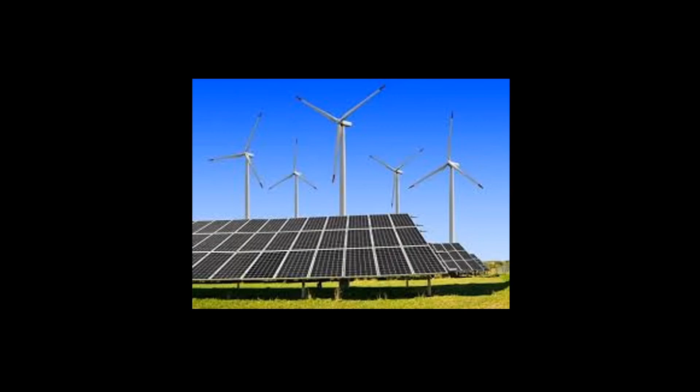So, net zero is going to be having an enormous impact on design and what we in the design industry are doing, because the federal net zero energy building goals were set up by Executive Order 13514, and they were signed into being in October of 2009. It's requiring that all new federal buildings that are entering the planning process in 2020 or thereafter be designed to achieve net zero energy by 2030.

And so you can imagine the ripples from this are going to be huge, similar to when they passed the Energy Independence Act for the electric light bulbs or lamps. What happened with that is they were going to require that initially they went to a higher energy efficiency and then would finally reach a 200% more energy efficient, which essentially made the incandescent lamp obsolete and really forced the LED into a fast track of adoption, of research and development, of really feasible uses for LED. So this whole thing of the net zero energy building code for federal buildings is going to have the same impact.

The concept of a net zero energy building, or an NZEB, one which produces as much energy as it uses over the course of a year, recently has been evolving from what was purely theoretical and then moved into the world of research and development. It's now actually crossed over into reality. Currently, there are only a small number of highly efficient buildings that meet the criteria to be called net zero. As a result of advances in construction technologies, renewable energy systems, and academic research, creating net zero energy buildings is becoming more and more feasible. And it's a good thing because, like I said, having that federal mandate coming on the horizon is really going to help push this. So make no mistake, net zero has become a reality.

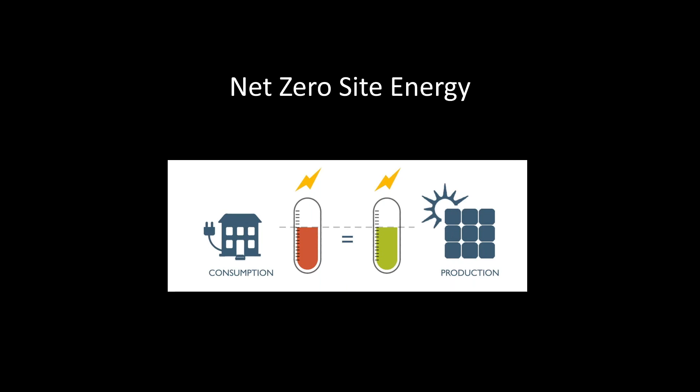So let's take a look at what these 4 different kinds of metrics that could be applied to your project are. Net zero site energy. This refers to the energy consumed and generated at a site, for example, a building, regardless of where or how that energy originated. So in a net zero site energy building, for every unit of energy that the building consumes over the course of a year, it must generate a unit of energy. And this is the most common use of the term net zero. And again, it doesn't really care necessarily where the energy originates from. It could be from a variety of sources.

Now, source energy refers to primary energy needed to extract and deliver energy to a site, including the energy that may be lost or wasted in the process of generation and transmission and distribution. Because when you have something going at an off-site, to get it to the actual building, there's actually a lot of energy that can be wasted in that process, especially if you're dealing with older infrastructure, older wires, and aging systems. There's a lot of waste that can occur in that.

So, for example, you may have a coal burning power plant, and they may generate 1 joule of electricity for every 3 joules of energy coal consumed. So, if natural gas is used at a site, for every 20 joules consumed, 1 joule may be needed to extract and distribute the gas to the site. That factors into your energy use. So the metrics that they're using for net zero source energy buildings account for these factors. So though the exact metrics can vary depending on the site and depending on the utility factors, it is accounting for how much energy is used to get that energy to the building itself, all the way from the coal to the natural gas, okay?

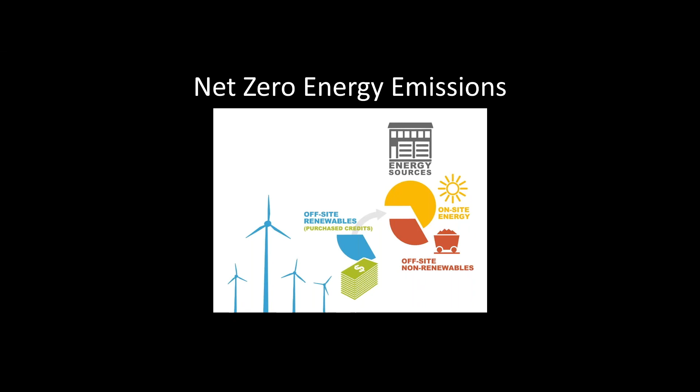Now, net zero energy building principles, whichever metric you're choosing, can be applied to most types of projects, including residential, industrial, commercial buildings, in both new construction and existing buildings. Now, the NREL South Table Mountain campus in Golden, Colorado consists of over a dozen buildings that have achieved not only LEED certification, but most of them have also achieved net zero energy status and are now being used as models for sustainability. Everything down to xeriscape native plant landscaping, so that they can minimize their water usage, is part of this.

So the research support facility building is currently the largest NZEB, net zero energy building, in the United States. So this is for people that say you can't do net zero energy on a large scale. This is a 220,000 square foot project that achieved the net zero site energy goal through a performance-based design build process. So the design and construction teams work very closely together on this.

Numerous energy efficient strategies were implemented, including incorporating advanced heat recovery technologies that were developed and designed by the researchers at the lab, and also installing 1.6 megawatts of photovoltaic power on the campus through a power purchase agreement. Additionally, daylighting, natural ventilation, and a next generation energy efficient data center are among the energy features of this building.

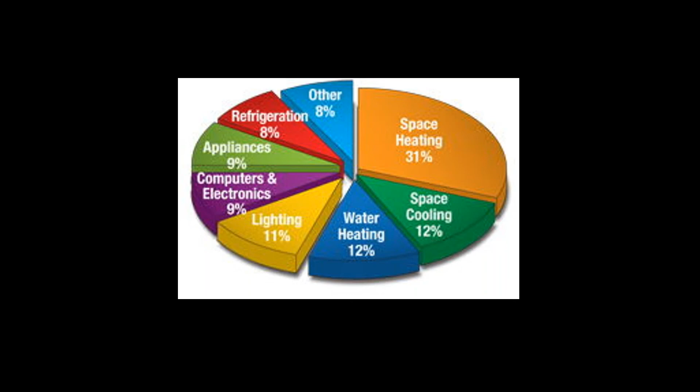Now, on average, the biggest chunk by far goes to heating and cooling at more than 40% of the electricity consumption. Second highest, water heating, 12%. Next, lighting. That's actually gone down as we've seen more and more LED being incorporated in, but still a significant chunk. And then you get into 17% for things like the refrigerator and other appliances that you may have in the house. So simply by specifying products that are more energy efficient, maybe Energy Star rated, you can have a dramatic impact on the total consumption amount for the house. So things like high efficiency appliances.

Energy Star is a rating system, and they provide energy efficiency ratings on a whole massive slew of equipment. For example, refrigerators, freezers, clothes washers and dryers, dishwashers, water heaters, HVAC equipment, televisions. You're all kind of aware of those probably, but you also have to know that they do windows, doors, skylights, roofing products, even light fixtures and lamps, and more and more. Energy Star is actually a U.S. Environmental Protection Agency, EPA, voluntary program.

It was established in 1992 to help promote energy efficient products and buildings in order to reduce energy consumption, to improve energy security, because as a nation, energy use definitely impacts the security of the country. If you are in a fragile state, where you have very high energy demands and you can't guarantee the energy supply, that threatens your energy security. Also, reducing pollution through voluntary labeling or other forms of communication about the products and buildings that meet the highest energy efficiency standards. So they have certifications for homes, for buildings, and more than 50 different types of products that are energy efficient and offer the features and performance that today's clients expect.

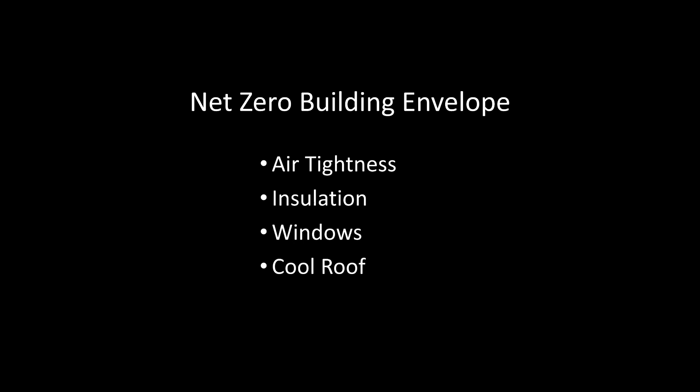That's right. We can build these homes with 70%, 75% or more less energy consumption. Can you imagine as a nation if all of the homes were 75% less energy consumptive? We are talking game changing.

This is game changing. So the first thing I want to talk about is air tightness, specifically using fully adhered membranes. With a fully adhered membrane, you can actually achieve air tightness with a minimum of 1.5 air changes per hour at 50 pascals unit of pressure. There are several ways to achieve this, but one of the best is to literally wrap the entire structure with a fully adhered membrane.

Now, this membrane is the water control layer, the air control layer, and the vapor control layer. It needs to be installed so it is continuous, including sealing it to the bottom of the house.

The OSB or plywood sheathing is going to serve as a vapor throttle, because when you talk about doing this kind of membrane, the first thought most people have, especially if you live in a hot and humid climate, is moisture. Oh no, it's going to trap moisture. Oh no, we're going to get mold. Oh no, there's going to be lawsuits. This is a technology that has evolved greatly beyond what you might have initially thought.

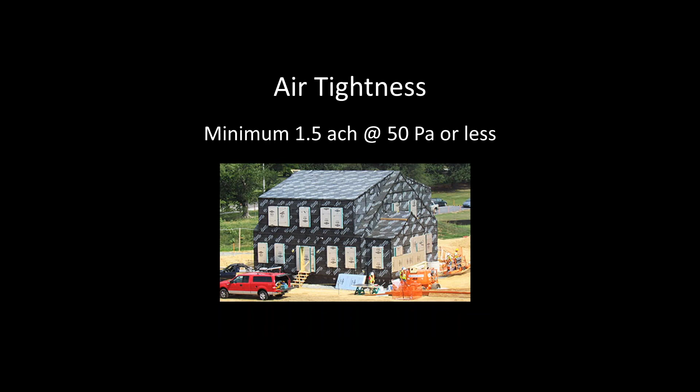So this is our kind of Darth Vader house right now, it's all wrapped in black. The lookout framing can then be added over the top of the membrane, so I have a continuously sealed membrane. You can see in this image here, they're starting to add the little overhangs, and these are a type of almost a snap-away overhang.

If you are building in an area where you have extreme weather, extreme high wind loads, maybe like hurricanes, one of the things that rips a roof off in a hurricane is because the air gets under the overhang and it snaps the roof off the structure. In this situation, my core building is that little building that looks like something a 4-year-old drew in crayons. The wind could get under these overhangs, break them away, but the building should maintain its integrity. So not only do I get a good thermal membrane, but it also gives me a little bit more structural flexibility in high wind loads.

So that lookout framing can be added over the top of the membrane. The next thing is the insulation, so that's all the little white panels you're seeing. That is rigid insulation board, and it is cut to fit inside the open frame cavities of the lookout framing. Then the entire building is covered in a continuous layer of insulation.

This is completely contrary, kind of the reverse of the way we always built walls, where we put the insulation on the inside. The problem with that, and you all know this if you've ever had to do energy calculations, is every stud is a thermal gap. That greatly diminishes your energy efficiency because you have all of those thermal gaps every time you have structural members. By putting continuous insulation on the exterior of the building, you completely eliminate that.

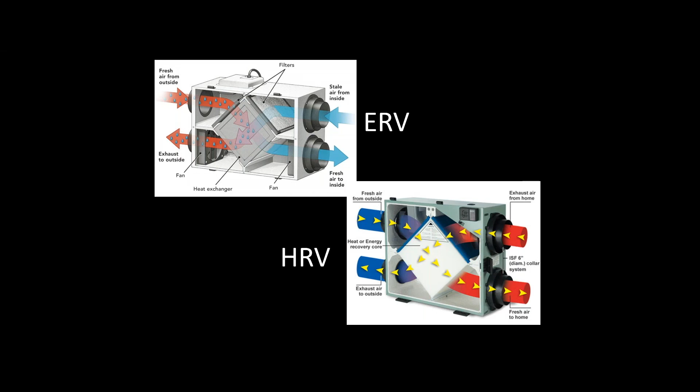Now, one of the biggest challenges when you're trying to build your thermal envelope is also the insulation. And the question is: how much do I use? Where should it go? What kind of insulation should I use? Myriad questions, as you can imagine.

The standard residential construction in most of the country is 2x4 wood framing with fiberglass insulation batts, which achieves a whopping R10 for your walls. If insulation is installed at all on the foundation walls, it's rarely more than an inch thick, and insulation is almost never put under the slabs.

Some states, for example Vermont, started to require developers to improve energy performance, and that led to a widespread switch to 2x6 framing in home building. We're seeing that continuing - a lot of production builders are incorporating the 2x6 framing.

But 2x6 wall construction is still fairly inadequate. A well-built 2x6 frame wall insulated with dense packed cellulose or fiberglass batt is still only going to achieve about an R17 or R18, accounting for that thermal bridging through the conductive wood studs. It's hard to get a higher R value because you have so many thermal breaks.

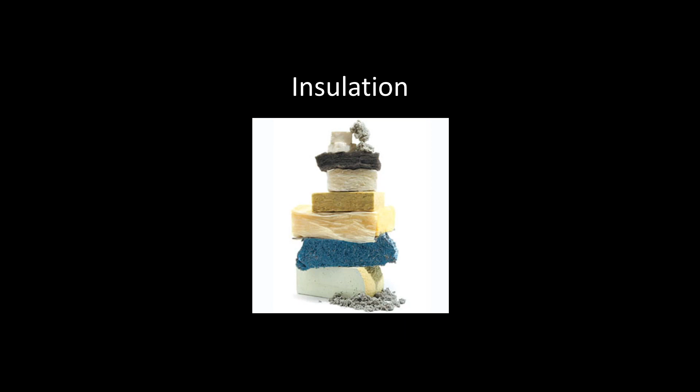So what is a reasonable target that we should now be aiming for when it comes to insulating? I hope you're sitting down. This is your rule of thumb. We used to think that 2x6 walls insulated with fiberglass or cellulose were perfectly adequate, even defining that house as energy efficient compared to standard construction with a poorly insulated 2x4 wall. But that was also when oil was 12 bucks a barrel that we called that an energy efficient wall.

It takes a lot more insulation, and in different places, to achieve the level of resilience needed to ensure that the house is going to maintain livable conditions without supplemental heat or electricity, or with very little supplemental heat or electricity. So the new standard rule of thumb for insulation is 10, 20, 40, 60 - remember that. You're going to have R10 under the concrete slab, R20 in the foundation walls.

I have a friend of mine who's an HVAC engineer in Florida. This is when he started to get shaky - when I said R40 for above grade house walls. And I completely lost him when I said R60 for the ceiling or the roof. He said, 'Can't be done, can't be done.' I will prove to you it can be done, and there are numerous buildings now that are doing it.

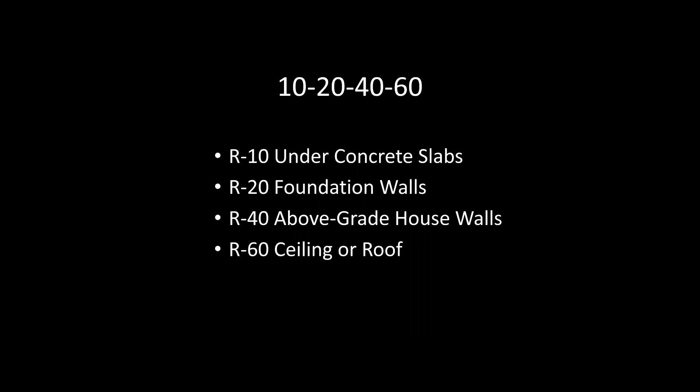So new rigid insulation materials applied to the exterior - first off, they eliminate all that thermal bridging, all of those voids from the structural framing. That's a big benefit. There are a variety of products, everything from foil-faced polyiso to XPS to EPS to rock wool. It's a matter of specifying what you think is best for your project.

Some true sustainable purists do not like to use any of the rigid foam, because rigid foam is a derivation from the petroleum industry. If you're trying to go completely petrochemical free and oil free, that's a byproduct of oil production. But they don't conduct any moisture, which could be a nice benefit depending on what you're trying to achieve. For those who are completely opposed to using any of these petroleum products, the rock wool rigid boards would be pretty much your only choice.

Amongst those, Roxul was kind of the one that has these full rigid boards. It used to be rock wool was just that loose felty type thing - now these are actually pressed rigid boards. Looking at some of the values: polyisocyanurate, 4 inches thick, gives you R24; extruded polystyrene, the XPS, at 5 inches thick, R25; expanded polystyrene, the EPS, at 6 inches thick, R23; and rock wool at 6 inches thick is R24. So these are all fairly comparable, and considerably better than just doing batts in a 2x6.

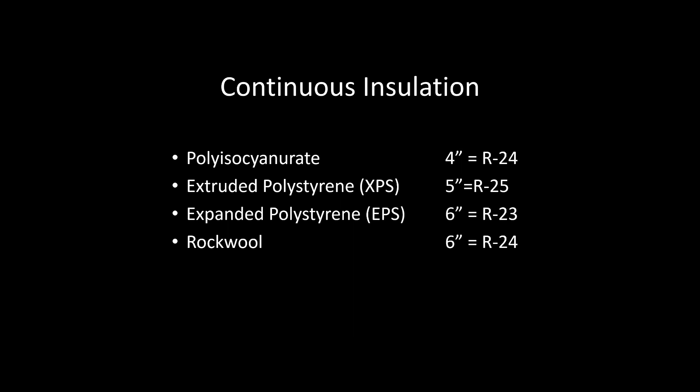Now this type of wall construction we've been talking about, where you've got that reverse exterior insulation, is what's becoming known as the perfect wall. The Building Science Corporation, Joe Lstiburek's group, has come up with these basics, but the concept of putting an enclosure together like this was actually figured out a long time ago, mostly by people living in extremely cold climates like Canada and Norway.

So the perfect wall is what's diagrammed here. You have 2x6 pine studs, 24 inches on center. You have half-inch OSB sheathing, then a continuous adhered membrane - in this case we're using Carlisle's 40 mil peel and stick, which is your air, water, and vapor barrier. Then we do two layers of 1.5-inch foil-faced polyiso rigid insulation boards, a 1x4 pressure-treated lath rain screen, and then the siding.

In this case, this image is showing corrugated metal siding, but it could be any of the cementitious products - there are a lot of different choices for siding. So an advantage of having continuous insulation on the exterior is, primarily, you have continuous insulation.

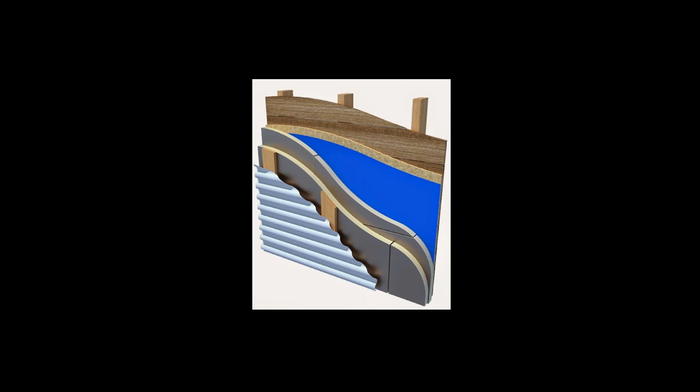No breaks for the studs. This method of wall construction allows you to think about the interior finish out very differently, because you don't have to insulate the stud cavities. Heck, you don't even have to cover the studs. So the continuous insulation is actually applied over the sealed membrane, including the roof.

Remember, we had that black box house, and then we put the lookout framing for all the overhangs. And then we started putting the rigid insulation board continuously around it. You're going to tape all the seams so that you have a tight seal, and that's including the roof. So all the sides of this will be wrapped.

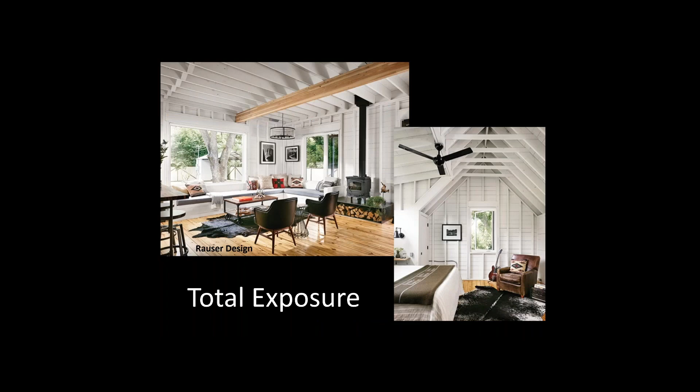Now, remember I said this allows you to get a lot more freedom in how you address the interior finish out as well. For example, take a look at this house. The only reason you put sheetrock up is to cover all the insulation in the cavities half the time.

So in this particular design, this was designed by Rauser Design. It was built by Risinger Homes in East Austin, Texas. And so when I say we have actual case studies of these things in extreme climates, and if y'all don't think there's an extreme climate in Austin, Texas, I challenge you to come here when it's 105 degrees and we have 85% humidity, and that does happen.

And so this kind of thing, you can actually leave all of that open. This is a very different aesthetic look than you could achieve with traditional house construction, and you have a much better thermal envelope for this entire structure. Their electric bill is almost free for this one. They can go pretty much off grid, even though they're in the municipal center.

Now, the other thing are structural insulated panels. Structural insulated panels, most of you have probably heard of them, they're called SIPs boards. This is actually a composite building material. It consists of an insulating layer of rigid core sandwiched between two layers of structural board. So they're most commonly made of OSB panels sandwiched around a foam core.

Now, foam, there's two different kinds. You've got the expanded polystyrene, EPS. You also have the extruded polystyrene, XPS, or rigid polyurethane foams.

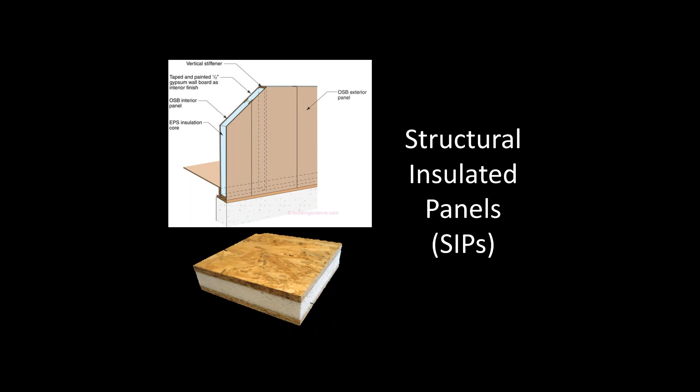The other kind of wall structure you may want to consider for your envelope: most brands of insulated concrete forms, or ICFs, consist of two parallel panels of foam held apart by rigid plastic spacers. The builders stack the ICFs. If you've ever been involved with one of these types of projects, or been on a job site where they're using ICF, it's kind of like a gigantic Lego assembly.

So they stack the ICFs like Lego blocks, brace those forms, and run rebar through the interiors, and then they fill the forms with concrete straight out of a pumper truck. Now, the ICFs are left in place as a permanent part of the building.

So don't think of this as a form where you pour the concrete and remove it. These stay as a permanent part of the building, and they are becoming more and more common, particularly in Florida.

Among the advantages over conventional wood framing or even metal framing: very, very low air infiltration, extremely high thermal mass, incredibly strong and fire resistant, very good sound deadening qualities, and much higher insulating values than especially a standard masonry like CMU construction. They can be used to form the basement walls alone or for the entire wall system, including all of the above grade walls.

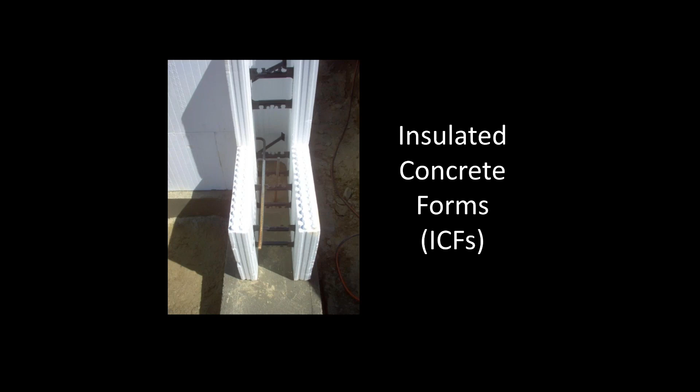So for composite building materials, let's take a look at some of their comparisons. These are minimal R values - I've seen them with much, much higher ones, but I'm trying to go on the conservative end in this presentation. So you all know concrete has virtually no insulating value.

It's got an R value of about 0.08 per inch of concrete. As a result, the R value with the ICF actually depends on the thickness of the foam, so they can range from an R12 and up. Instead, they rely on the thermal mass to add to the energy saving.

That's where concrete is good, with thermal massing, and that can vary upon the location depending on the weather. For example, Minneapolis and Chicago achieve much less of a thermal mass benefit than Phoenix or Bakersfield, California. So the performance R value can vary dramatically depending on the region.

No surprise there, right? So in some instances, builders have added additional continuous rigid insulation to the exterior of an ICF building to boost the R value even further. Both of these materials do eliminate thermal bridges, as they are a continuous insulated material.

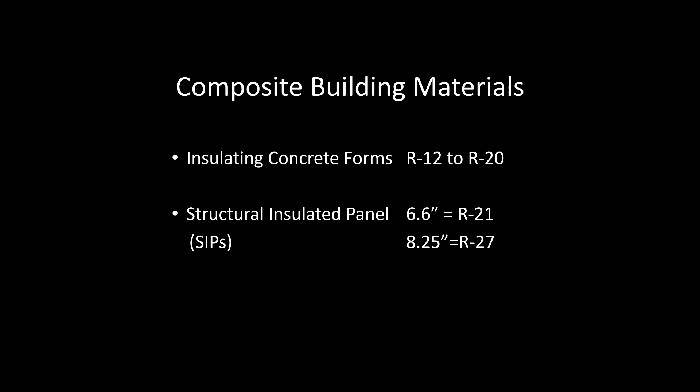But you better make sure you've got all your conduits for your electrical before that concrete truck pulls up. You want to make sure you have all your plumbing and electrical - your conduits, everything - in those forms before you start pouring, because it is very difficult to change window penetrations or anything in those cavities.

Almost impossible. Now, windows are one of the thermal issues. Everybody loves a window, not necessarily the heat gain from it. Typically with windows, R5 is the minimum to look for, but some companies are really starting to go beyond that. They're really re-looking at the window. High efficiency windows include well-built, air-sealed windows with good thermal performance.

Not great, but good. Typically what you're looking at is a double glazed or triple glazed window with insulating gas between the panes, usually argon or krypton, and a low E, or low emissivity, coating. That's what gets considered a high efficiency window. And high efficiency - if you've got an old house with double hung windows with counterweights, an air leak, and a single pane of glass, this is a light year ahead of that.

Now, that low emissivity coating, the low E coating, is what's preventing the radiant heat from crossing the window plane. For example, it keeps the heat inside in the winter, but outside in the summer. Now, the framing material is as important, if not more important, than the glass.

Framing materials like fiberglass and wood have very low rates of thermal energy transmission when you compare them to aluminum or PVC vinyl. Those consistently have some of the highest negative environmental and health impacts according to the life cycle assessment techniques from the United States Green Building Council.

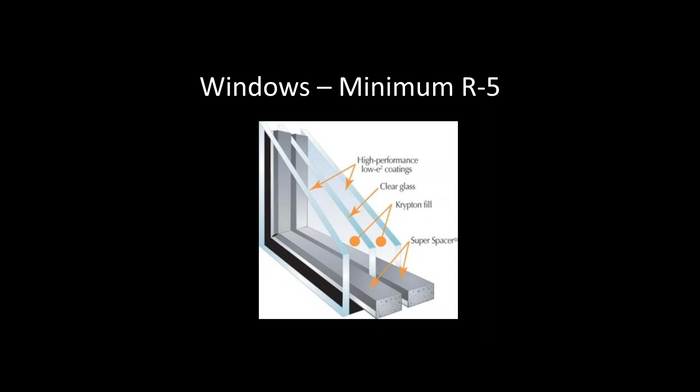So what does it all mean? Well, when you're dealing with windows and glazing, there's a whole alphabet soup out there. A lot of things are thrown around as terms, and some of them are kind of doublespeak. So you've got low E, U factor, the solar heat gain coefficient, SHGC, and the visible light transmittance, the VLT.

So low E windows have a microscopically thin coating to lower the U factor, or in other words, its ability to transfer heat. A low E coating can reduce the energy flow 30 to 50%. Just this coating, 30% to 50% reduced energy flowing through that window, usually in the form of heat.

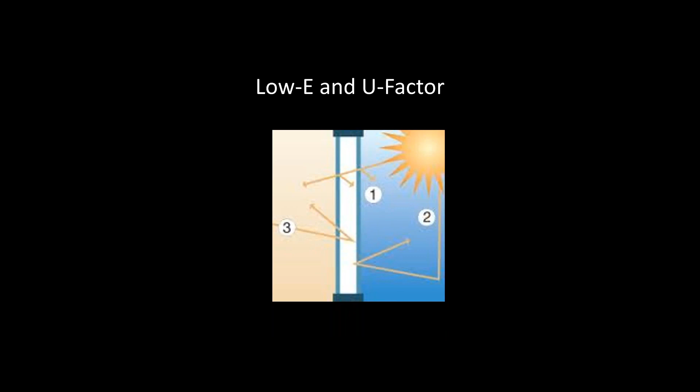So what is the difference between U factor and R value? And this is always the problem. Everything else that has anything to do with insulation uses an R value rating, except windows. They use a U factor rating. So the U factor is used to express the insulation value of a window. R value is for everything else. So how do I do an apples to apples if I'm trying to do my overall energy consumption and my overall energy rating for the entire structure?

Very simple. Math, my favorite thing, right? So to compare R value and U factor, all you have to do is divide 1 by the U factor number. So for example, you have a 0.25 U factor. 0.25 goes into 1 how many times? This is even math that I can handle. Goes in 4 times. Therefore, it has an R4 rating. If you've got a 0.20 U factor rating, 0.2 goes into 1 5 times. You got an R5 rating.

So in other words, it's kind of opposite. You have to stretch your brain a little bit. The higher the U value, the lower the R value. So these are in opposition to each other. So just remember, opposite, high U factor, ugly. U for ugly, the higher it goes, not good.

Now, in the past, the recommendation was that in northern climates, windows with a higher U factor, which meant a lower R value, a lower insulation level, but with a higher solar heat gain coefficient, were better because they allowed for using thermal mass to store heat for the structure. Now, in southern climates, a product with a lower U factor, which had a higher R value or higher insulating value, and a lower solar heat gain coefficient was more desirable because it would decrease the thermal heat.

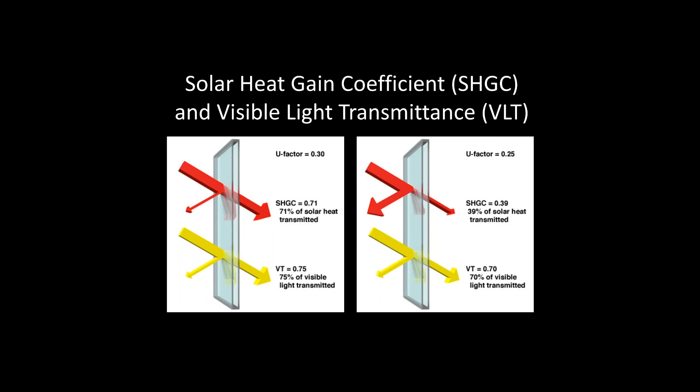So one note on the difference between net zero energy goals and resilient energy goals: sometimes their objectives may not perfectly line up. So, for example, with net zero energy, you want to have an extremely efficient envelope, and you can keep the climate controlled with very little energy because of that.

But you know this, even with a high energy window, every time you punch a hole in a wall, you're reducing the efficiency of your envelope. So, net zero doesn't want you to have windows, but resilient design says you may still run out of energy production, so you need to have a building with operable windows to take advantage of passive cooling.

So this is where there needs to be a little bit of latitude in your overall scope of what you're trying to achieve. And so where are the priorities placed? If you want to have windows for aesthetics, look at where you're placing those windows so that you can minimize the impact as much as possible.

Now, the other part of your envelope is the roof. And when it comes to the roof, getting an R60 will give you unbelievable returns. And believe me, this is where I lost my friend who's the mechanical engineer who designs cooling systems in Southeast Florida. He's like, R60, not going to happen. And when I showed him this, he actually had to eat his words and go, okay, it is happening. You can make it work.

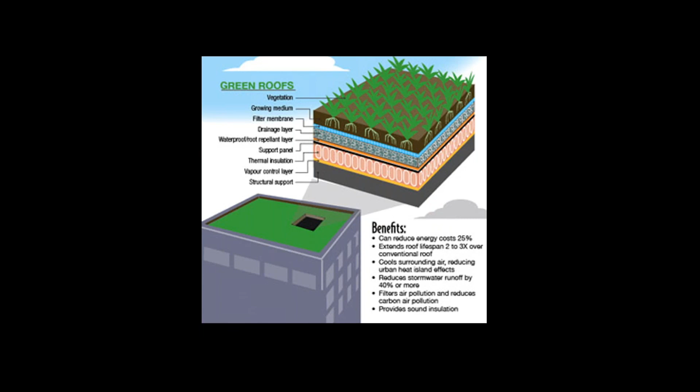And they stand up very well to extreme weather like high hail or other kinds of impact. You may have to replant your roof. Your tomatoes and corn and beans may get smashed, but the roof itself will do a much better job of standing up to these weather extremes.

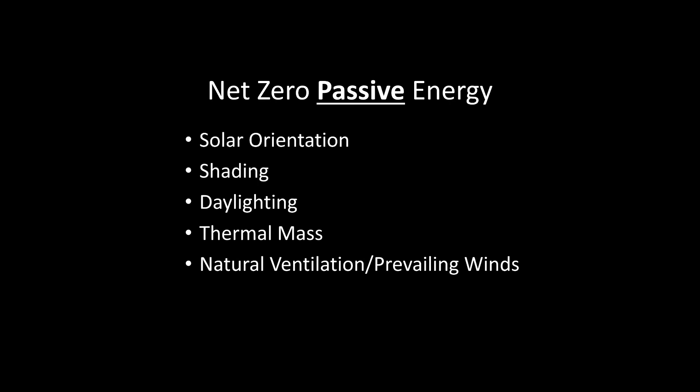So the other type of thing is when we're looking at net zero, you have passive energy and active energy. And so net zero passive energy, some examples of passive energy are solar orientation, shading, daylighting, thermal mass, and natural ventilation and prevailing winds.

Solar orientation, most of us are familiar with this one. It's how the house is oriented to the sun, and it can have a dramatic impact on heating and cooling costs. The goal is to maximize natural daylight year-round and gain heat only when desired.

So to do this, the home should be longer from east to west than it is from north to south. In fact, the U.S. Green Building Council recommends that the longer east-west axis be a minimum of 1.5 times longer than the north-south axis. Furthermore, the longer axis should not be more than 15 degrees off of the geographical east-west axis.

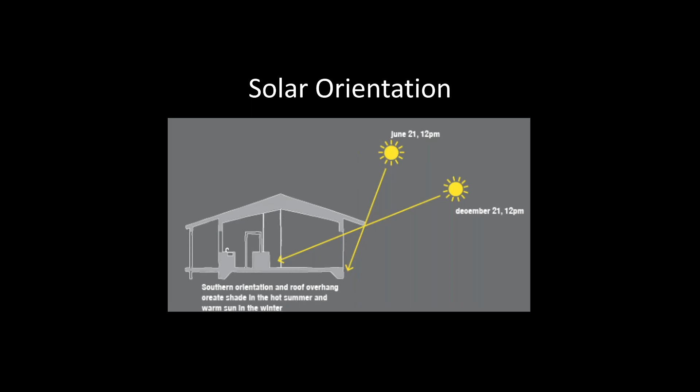So things like roof overhangs, louvers, trees, these are all commonly used to block direct sunlight in the summer months when it would overheat the home. Now, placing the majority of the windows on the southern wall and orienting the primary rooms like the great room maximizes that sunlight to naturally light the space and reduce the need for electric lighting.

Northern rooms are going to have the least natural light and make the least sense to put breaks in the thermal envelope, for example, the windows. Lay out the space so that bathrooms, utility rooms, closets go in western rooms; they're going to get full blazing sun as it sets. If the windows are placed here, make sure that you're either incorporating shading or you're putting the highest R-value windows that you possibly can there. So that makes a big difference.

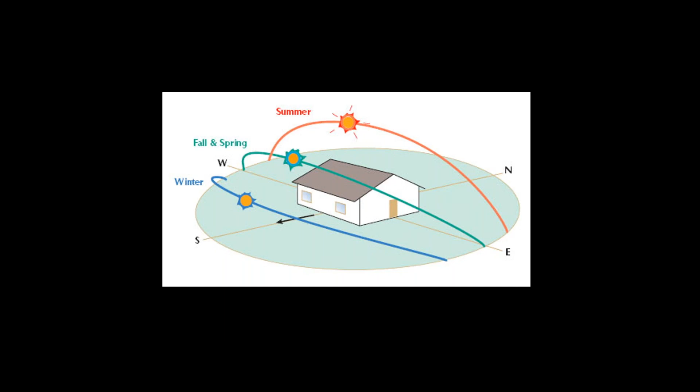Now, when you're talking about shading, either use design or use Mother Nature to incorporate shading, particularly in southern climates. You want to shade the roof, the western exposure, and as many of the windows as possible to greatly improve the quality of life for the inhabitants, especially if there's an event and there is no air conditioning in the middle of summer, like after a hurricane.

So if you want to know what that's like, how fun it is to live in a non-air conditioned house in South Florida with 2 weeks of no electricity after a hurricane in August and no electric fans, it is a very special joy that once you experience that, you never quite forget it, do you?

So by adding shading panels, you can greatly reduce the solar heat gain of the structure. Now, if those panels are able to cool the air before it enters the building, you're using the same natural cooling that was incorporated into buildings long before the use of electricity and electric cooling. So you get a lot of bang for the buck.

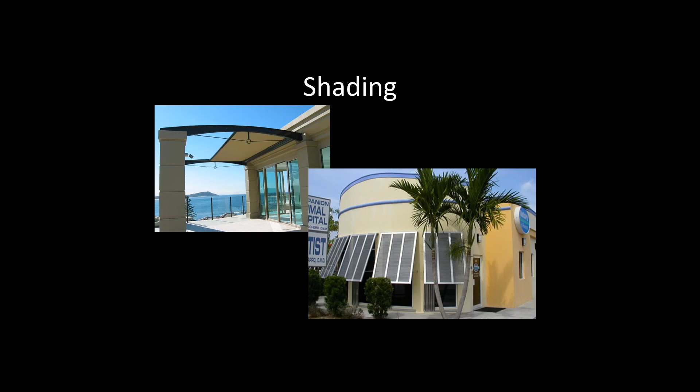Proper window shading is going to allow for optimal solar heat gain in the winter while limiting the unwanted solar heat gain during the summer. And so a correctly sized roof overhang is going to completely shade a window at solar noon on June 21st, the warmest and sunniest month of the year in the Northern Hemisphere.

Windows that face east or west are going to require larger overhangs or vertically mounted shading devices to complete that shading. Shading the windows from the summer sun is going to help to maintain much more comfortable conditions inside a building, as well as considerably lower the annual cooling costs and lower the energy requirements.

So one thing to note, while the big overhangs in this image, for example, are great for shading, this is not a roof that has a high probability of surviving a high wind event unless you built it with lookout framing and snap-away edges.

So you have to look at the overall picture, not just resilience, not just lower energy, but structural integrity as well.

Daylighting is the practice of placing windows or other openings and reflective surfaces so that during the day, natural light provides effective internal lighting. If buildings have proper daylighting, you can dramatically reduce the need for electric lighting, making them both closer to net zero energy and more resilient. Bang for the buck, right?

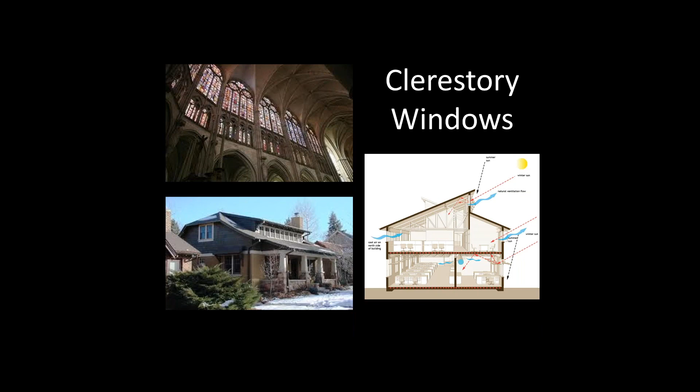They can also be used to provide natural ventilation when used as heat chimney releases. So for example, if you have cool air coming in - look at the image on your lower right - the cool air comes in on one side of the building, blows through the building and through the heat cavities in the upper areas, and you can use the clerestory to create that ventilation flow so that you're optimizing the air cooling effect.

Clerestory windows can also be placed to add natural light in areas that you otherwise may not be able to receive natural light, or it doesn't make sense to put a window there. By being high up, they can also be protected from too much sun because of the overhanging eaves, so they can work well in rooms that would receive too much sun otherwise, like a western facing room. You put a higher clerestory, you can still get some natural light, but you're saved from a lot of that heat gain.

A light shelf is an architectural element that allows daylight to penetrate much more deeply into a building. If you've done a lot of commercial architecture, you've probably used light shelves, typically on the exterior of the building. A horizontal light reflecting overhang is placed above eye level and has a very high reflectance coating on the upper surface. That surface is used to reflect and bounce that daylighting onto the ceiling, and then it reflects off the ceiling indirectly and penetrates much deeper into the interior space than is possible with just windows.

Light shelves make it possible for daylight to penetrate the space up to 2.5 times the distance between the floor and the top of the window. So go from your finished floor to the top of your window and multiply that by 2.5 times - you can actually get natural light that much further into the space. With some advanced light shelf technology, you can make that number 4 times the distance.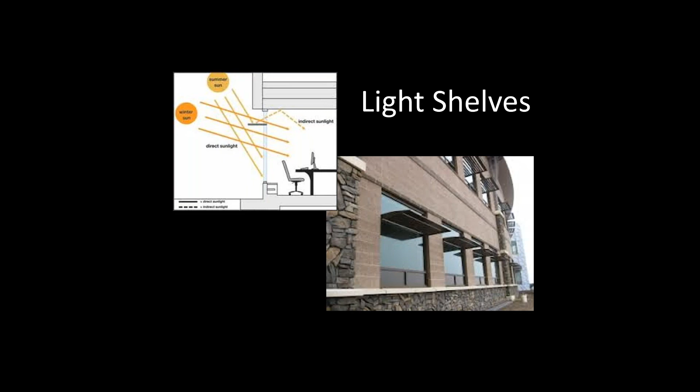Now, light shelves can also be effective indoors as well. Plus, you don't have to be as considerate with them. You don't have to worry about them being destroyed in high winds or in a storm. Now, if you use a paint with a high light reflectance value, you can almost triple the amount of light that can be brought in. And that light is also low glare, indirect light, which from a lighting design perspective is what we're always trying to achieve, reducing the amount of glare. That's our optimal goal.

Now, the winning combination is to combine the light shelf, whether they're exterior or interior, with clerestory windows. You can create a great deal of deeply penetrating light with a lot less glare, and because the windows are going to be more shaded by the overhang, a lot less heat coming through that space, and also good privacy.

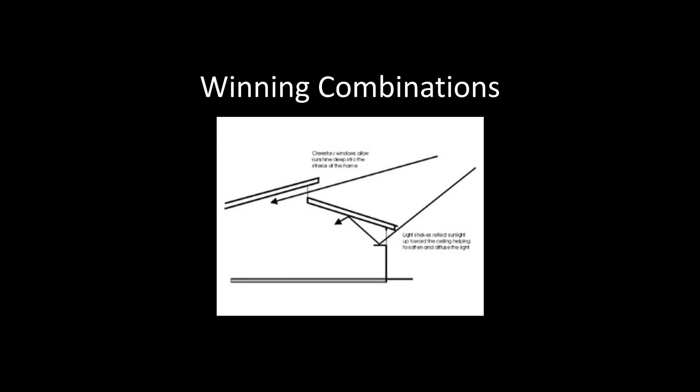The other way to do daylighting is through skylights, and skylights have come a long way. They are much more energy efficient with low E glass, and they come with sealed collars for virtually a foolproof insulation, if you want to think of it that way. Now, large skylights can compromise the thermal envelope, and they're not as resilient from impact events like hail.

There are other types of things out now, like solar tube products, that are a great way to light a small room for closets, hallways, pantries, bathrooms. And they even come with the option to have an LED lamp inside the tube so that they can be used at night as well.

Now, these are actually able to reflect moonlight and starlight really, really well. And so when we first started to put these kinds of tubes in, we had to be mindful - they actually went back and re-engineered them so they have a baffle in them so that you can turn them off, because people were complaining that you put this in their master bathroom and it was so much light coming through at night, especially with a full moon, it was keeping them awake in the master bedroom.

So look at the options available in these kinds of products and make sure you're specifying correctly. Now, it is still a penetration in the envelope, but they have some very low profile ones, and it's a much smaller penetration. So that can help keep your energy efficiency in your envelope.

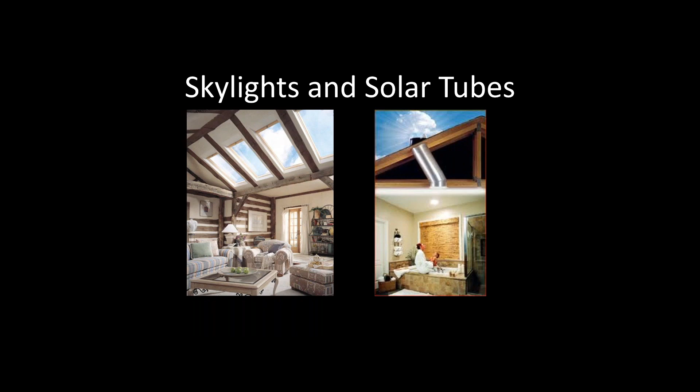Now, solar tubes, the inside is also getting a little bit more fashionable. Instead of just that frosted lens, that 10, 12, 14, 16-inch frosted lens, they're actually making the lenses for these integrated into what looks like a surface mounted light fixture. The one on the upper left is obviously the European company, and the other three are the American companies, but they look a lot better than they did as far as improving the aesthetics.

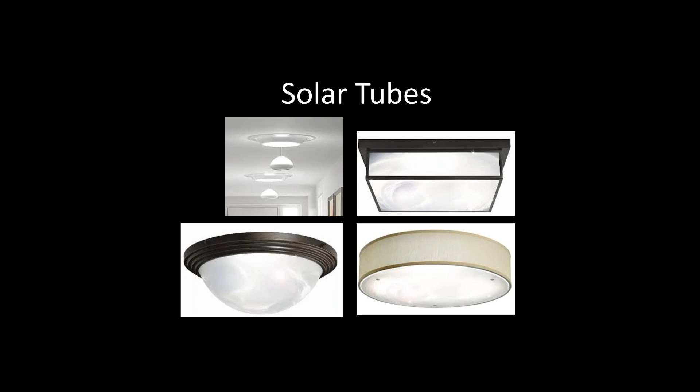The other passive energy is thermal massing. Now, this is using a material's resistance to change in temperature. Objects with a high thermal mass absorb and then retain that heat. And in locations where you have a huge temperature swing from day to night, for example, desert climates, thermal massing is always used to aid passive solar heat design.

Thermal mass can store the energy absorbed from the sun and then slowly release it over time. Conversely, it can resist heating up too fast from solar radiation. So it means that instead of the first couple millimeters of a wall heating up 5 or 10 degrees, the entire wall only heats up 1 to 2 degrees. So objects with a high thermal mass, for example, concrete, absorb and retain the heat.

It's slowing the rate at which the sun heats a space and the rate at which a space loses heat when the sun is gone. Without thermal mass, heat that has entered a space will simply re-radiate back out quickly, making the space overly hot with sunlight and overly cold without it.

Thermal mass, however, is not a substitute for insulation. I'm going to cause a war right now, because there is a major shift in thought that is gaining a lot of ground when it comes to the value of thermal mass. Yes, in parts of the world where you have these high temperature swings, this has been what's been done throughout the ages. This is now coming into study that it no longer is the correct way to build. In fact, more and more studies are starting to downgrade thermal mass when you compare it to super efficient insulation.

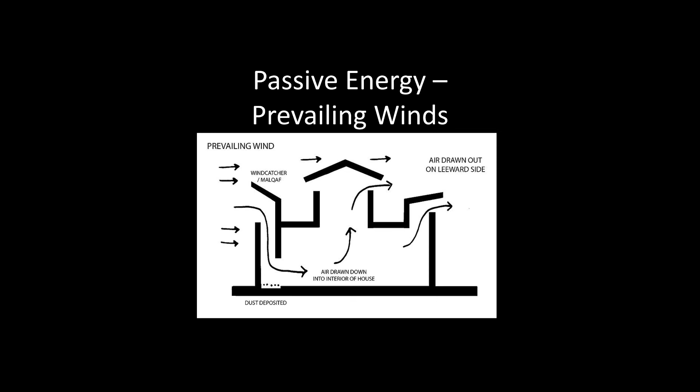Now, designing a building that can take advantage of summer breezes for passive cooling, as well as shield against adverse winds that can further chill the interior on an already cold day, or even prevent snow from piling up against the windows and doors. Just remember that prevailing winds can destroy a building when they're whipped up in that 200-mile-per-hour event. You don't want to be funneling 200-mile-per-hour wind through your structure.

But during the other times, you could have this wonderful central heat chimney core where the air comes through the house and funnels up through that, creating a wonderful cooling effect. What would that look like? I'm curious. If you come up with a really revolutionary one, send it to me. I'll share it with others.

Now, active energy can come from a variety of sources. All the ones we've been talking about so far, thermal massing, prevailing winds, solar, that's all passive. Active energy is using some form of mechanical and electrical equipment to convert the energy into power. So, for example, to achieve net zero active energy, you are dealing with primarily four different types of potential equipment: photovoltaic solar, solar thermal, geothermal, and wind. In some interpretations and guidelines, part of being net zero is to also have dramatically reduced carbon dioxide, CO2, emissions.

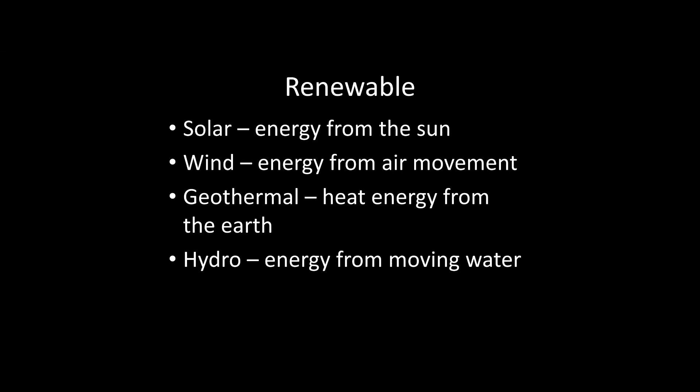Of those, solar, wind, and geothermal can be used for individual structures relatively easily, depending on the density for the location of the structures. Hydro energy is generated usually by dams or tidal generators, offshore tidal generators, and it's really only applicable for a large utility company or municipal utility company to use as an energy source. It's not really practical for one individual use.

Now, solar energy. Our sun. How hot is our sun? If I said, how hot is the sun at its core, in Fahrenheit degrees, how hot do you think it is? Right now, it's about 100 degrees in Texas. That's hot enough for me.

The interior core of our sun is 27 million degrees Fahrenheit. In one second, the sun produced enough energy equivalent to what we would use at current global consumption levels for 500,000 years. That is a pretty good little generator.

Now, we may not be able to achieve that level of energy production here on Earth, but our friend, the sun, can help us create at least some energy here using solar or photovoltaic panels. As a method of converting solar energy into direct current, DC, electricity, the direct conversion of sunlight to electricity occurs without any moving parts or environmental emissions during the operation. At its simplest, the light from the sun hits the solar panels, which are composed of a number of solar cells that contain photovoltaic material.

The panels are attached with copper wires and they produce DC current, direct current. Because most homes use AC, alternating current, usually there is an inverter to convert the current from DC to AC, and then the electricity can be used by the home.

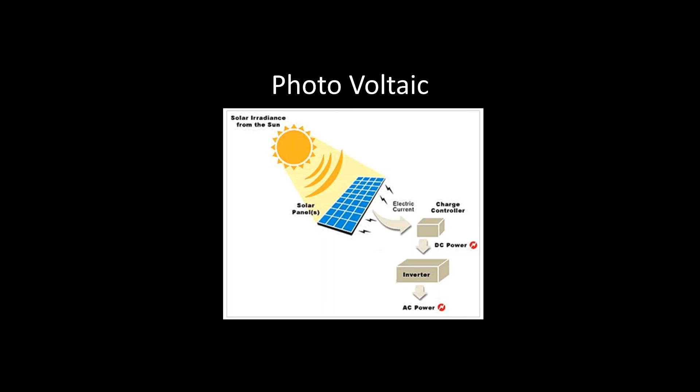Grid tied: photovoltaic panels, your solar panels, collect the solar energy and convert it into electricity. The basic components for this are the solar cell that converts the sunlight to DC electricity, the inverter that converts the DC energy to AC energy that powers the home, an AC circuit breaker panel, and an electric meter. The power is either routed to the utility company or to the house, and the connection allows excess energy to be routed to the local utility grid.

So basically, what we're talking about when it's grid tied is when the sun is shining, that structure can use the energy at that time, but it has no way to store that energy. So if you're using 50% of the energy that you're actually collecting, that additional 50% will go to the main utility grid, to your municipal utility company, and essentially you're going to use them as your battery. They're going to take that energy and use it for other people, and you get a credit for it. So they're paying you for your energy.

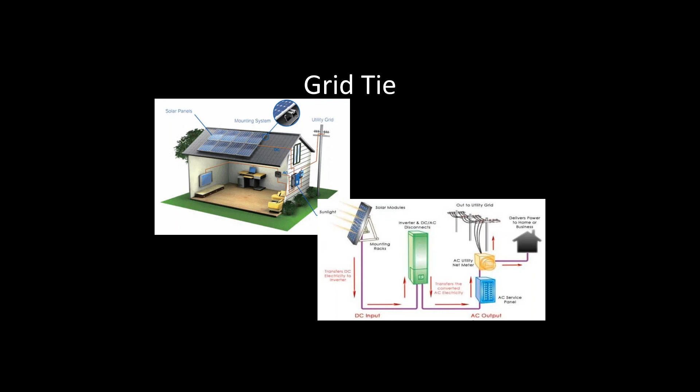Now you've had too many cloudy days in a row, or it's cloudy, or it's nighttime. At night, you're not producing any energy. So unless you're okay with sitting around in the dark with no air conditioning and no refrigerator, that's when you're happy to be tied to the grid, because now you can pull that energy back out of the grid. So either you will pull it back for free, or usually a small cost for using them as your backup storage. And if you're actually going to be using more energy at night than you were able to collect, you can buy the extra. So you will have continuous, easy power, you can't even tell that this is what you have. That's why a lot of people, when they do their first toe in the water with solar, they do a grid tied system.

The complete opposite of that is off grid. And off grid is possible, but you have to be very mindful, and your client has to be very mindful. It's the same concept: you have a PV array that generates DC electricity. That usually goes through a charge controller, which is some kind of throttle device. And that will go first into your battery bank, because your batteries use direct current energy. First you're going to charge up all those batteries, and then it's going to go through the inverter and be used in the house. A lot of people also incorporate a power backup generator as an additional backup energy source that can charge the batteries as well as supply electricity to the house. Whether those are propane, natural gas, diesel, or unleaded gas, there's a variety of those to supplement them. You have to be very, very careful with these, because too many cloudy days, or you run out of gas for the backup generator, and you're done.

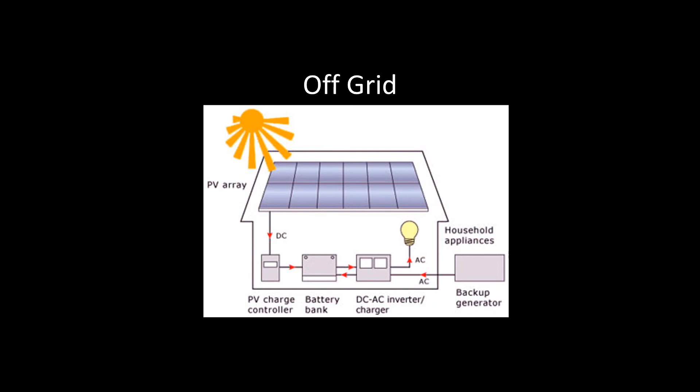Now, what a lot of people are looking at now for a newer solar system is grid tied with storage. This is the optimal design if you're trying to achieve resilient design, because it is the most flexible. It allows homeowners to produce their own electricity, then they can send some of it back to the utility company, so they can draw on the larger utility company grid when they need it. It gives you that feeling of seamless energy consumption. By adding some form of on-site energy storage, usually in the form of batteries, the owners can produce their own electricity, store some, and use some that they send back to the utility company. So if there is ever an event where there is an interruption in the centralized power, this is the most resilient design, because if the utilities are knocked out, this type of system allows homeowners to produce solar when the sun is shining, but also to have at least a nominal amount of power when the sun is not shining, like at night or if it starts to rain. So you have the ease of the utility company as your backup, the security of energy independence, and the flexible resilience of some on-site storage.

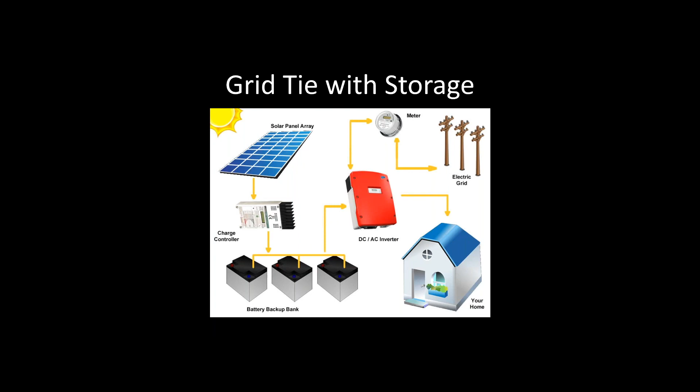Now, to show you where technology is going, this is a huge area for researchers, this idea of free energy. There's even research going on where they're trying to create a paint that would essentially be the solar collector. What they figured out how to do is particleize photovoltaic cells and mix them into paint. So getting solar energy could soon be as simple as painting the structure and hooking up a couple of wires so you can get that DC current off of the structure. I've actually talked to the researchers working on this, and they say the technology works great. Unfortunately, their paint keeps peeling, so they brought a chemist in to help them with that one. We do live in some pretty exciting times, with what's becoming possible.

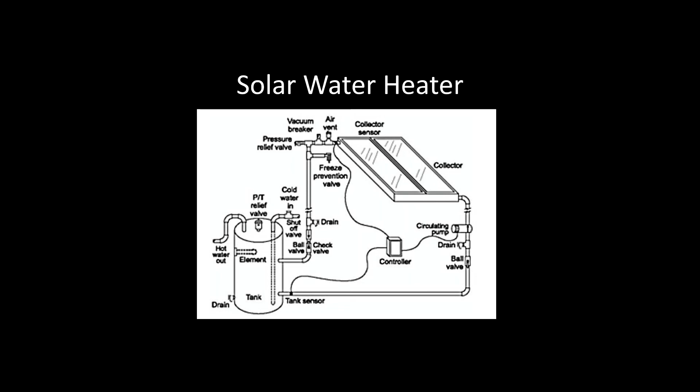And so, for example, on a swimming pool, to heat a competition-sized outdoor pool located in a warm climate, I'm not talking cold climate, a warm climate, is equivalent to the annual natural gas consumption of approximately 150 single-family homes. Wow. If you can do that with solar thermal, it's free. And so a lot of hotels, resorts, apartment complexes, health clubs, and schools are using solar pool heating as a much more efficient method.

Now, wind energy is using a wind power turbine to generate electricity. They can either be grid tied or off grid, just like solar panels. But here's the deal. For a home wind turbine to be worth the investment, you have to live on at least an acre or more. That's the guideline from the U.S. Department of Energy for their Guide to Small Wind Electric Systems, a wonderful free publication.

Now, on average, a typical American home would require a small turbine with a minimum 5 kilowatt generating capacity to meet all of its electrical needs. A turbine of this size has a diameter of approximately 18 feet, the exact size needed to power a home. However, it can range from 2 kilowatts to 10 kilowatts. So you're looking at a wind turbine that is 12 to 25 foot in diameter based on what that average home uses for its energy.

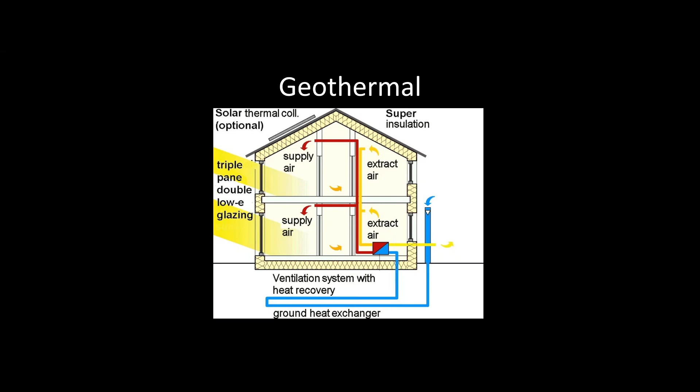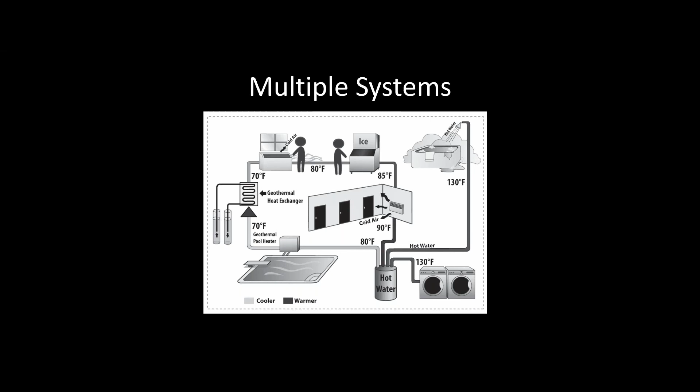The new technical guidelines eliminate the issue of thermal retention in the ground, so the heat can be exchanged with it indefinitely. In the past, some improperly sized systems would overheat or overcool the ground over time to the point that the system couldn't function. You have to have enough change in temperature gradient to allow this process to happen. So a geothermal system can heat the water, heat the pool, heat and cool the home, and can also be used in radiant flooring to heat the floors in the house all at the same time.

Now, geothermal systems use a heat pump for the HVAC system. So first things first, what is a heat pump? I like to start with the easy question. It is exactly like what it sounds. A heat pump moves heat from one place to another rather than creating heat or cooling by burning a fossil fuel like a furnace or a boiler. It does this by taking advantage of the fact that liquid refrigerants absorb huge amounts of heat when they evaporate into a gas, and release that same heat when they're condensed back into liquids.

So the most common kind of heat pump, called an air source heat pump, uses the energy in outdoor air to heat and cool. To cool a warm space, a heat pump evaporates the liquid refrigerant in the copper coils indoors and condenses it by a compressor in similar coils outdoors. To heat a cold room, a valve is activated that reverses the process. The gaseous refrigerant is condensed indoors, where it gives off the heat, and it evaporates in the outdoor coils, picking up heat from the outdoors in the process. Air conditioners and refrigerators use the same exact process to deliver cooling.

Why are they such great heating and cooling options? For one, heat pumps can be incredibly efficient because they move rather than create heat. They can often deliver 3 to 4 times more energy into your home than you use to power the heat pump. So very high efficiency air conditioners might get the same benefit.

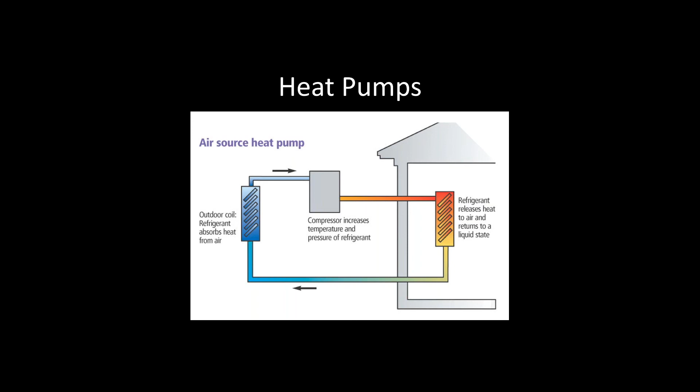In very, very hot climates with low heating needs, air source heat pumps are no more efficient than air conditioners, but they're more expensive. So fortunately, there's a great way around those limitations on traditional air source heat pumps. In even the most extreme climate regions, the temperature several feet underground is between 45 and 75 degrees Fahrenheit. Enter the geothermal heat pump, also called a geo-exchange.

And these electrically powered devices, which could be solar electric powered, circulate a fluid through piping buried in the ground, discharging the heat to the ground in the summer and pulling it from the ground in winter. The heat pump coils are in contact with this fluid rather than the outside air, as in a standard heat pump. Therefore, they avoid that huge temperature swing in the air temperature. So geothermal heat pumps can be incredibly efficient, delivering 3 to 6 times the amount of energy used to just power the pump's compressor and fans and pumps.

You can easily power those with solar power, and the systems run very quietly. There is no equipment outside, so no noise outside at all. So that traditional sound of summer of the air compressor on everybody's house, that thunk, you don't hear that anymore. And since there's no equipment exposed to the elements, they last a lot longer.

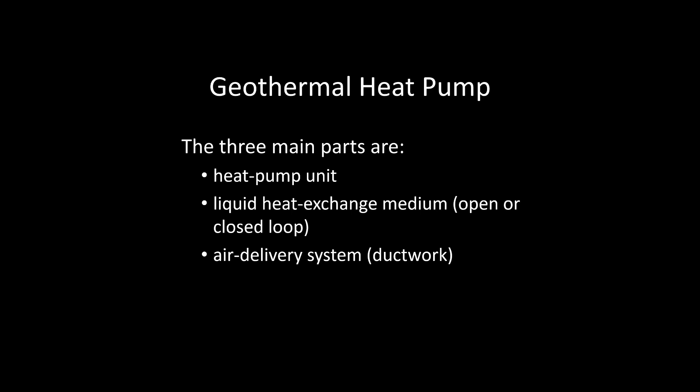So it's that very, very easy thing during the heating process. You're pulling the heat from the earth, and you're bringing that in, and then that's being circulated through the house. So the heat energy is transferred to the geothermal unit. The unit compresses that extracted heat to a high temperature and delivers it into the home through a duct system, regular old duct system or a radiant heat system.

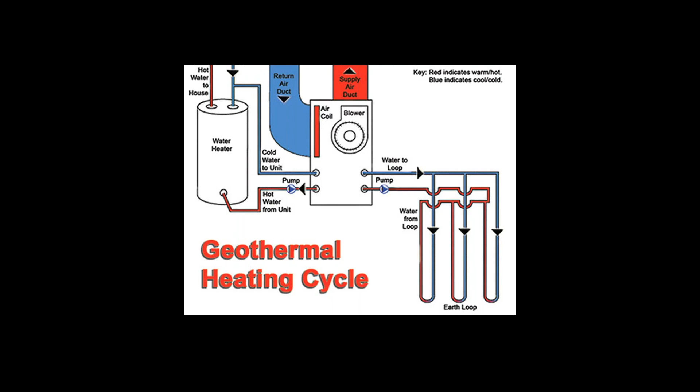Now for cooling, you just reverse it. Because the earth is much cooler than the air temperature on a hot day, the geothermal system removes the heat from the home and deposits it in the ground. The fluid is cooled by the ground temperature and returned to the unit for cooling the home.

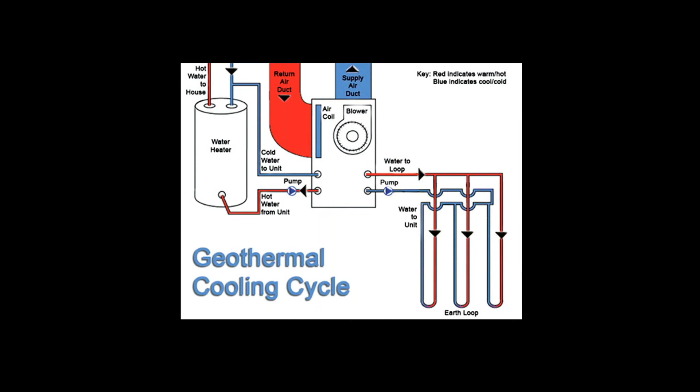Energy efficiency comparisons. An Energy Star rated electric central air conditioner has a minimum 15 SEER or 12 EER. EER is the energy efficiency rating in the cooling mode, and represents the ratio of total cooling capacity to the electric energy input. Geothermal heat pumps have an EER from 15.5 to 37. They're that much more efficient. So controlling all of that can be incredibly cost effective.

Now, there's a lot of different options for installing a ground source heat pump. You have closed loop and you have open loop. Now, closed loop is the more typical one that you're going to find. You have closed loop horizontal, where they do a series of trenches, typically 4 to 6 feet deep, 400 feet long, and then you coil that tubing up within those.

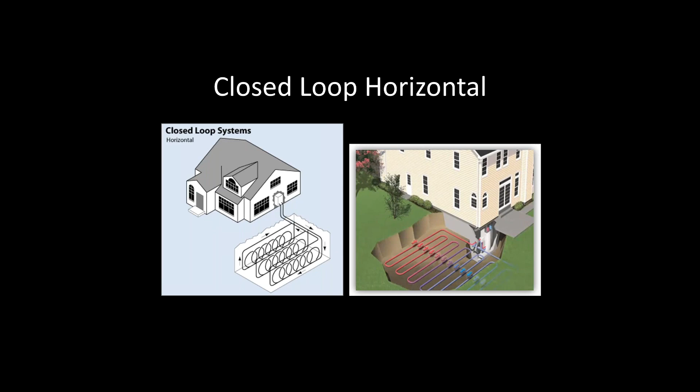Here's an image of a house that they've got the trenches dug, and you can see how the coils are laid in the bases of the trenches so that you can optimize that temperature exchange there. You can lay the loops flat, or they can lay them on their side. The other type is a vertical loop. Now, this is where you have maybe a smaller property or you've got to go deeper down.

And so pipes are inserted vertically into these holes that have been bored into the ground, usually by some kind of well drilling equipment. Holes could be 75 to 400 feet deep. Typically, they're about 125 to 150 feet per ton of heat pump capacity, and you could have multiple vertical shafts.

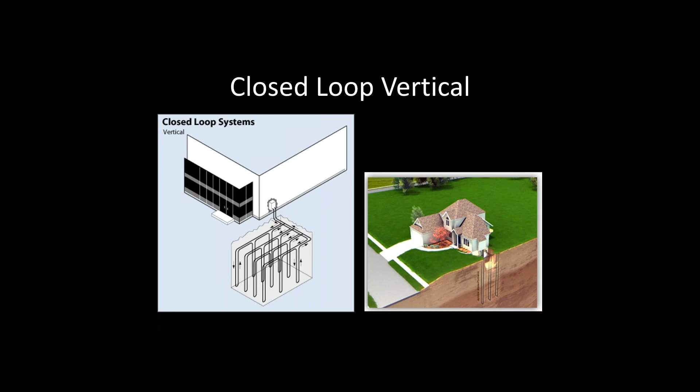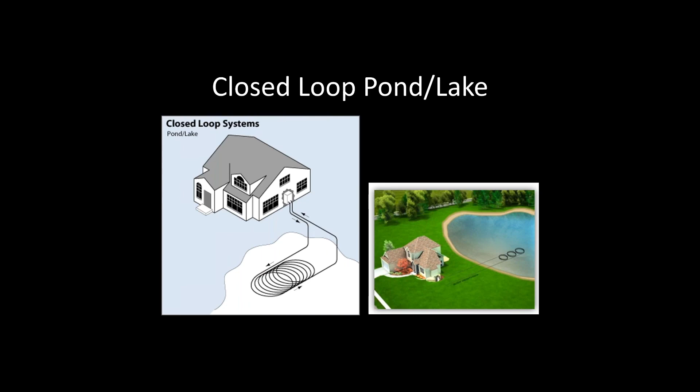Now, with closed loop, you can also do a pond or a lake if you've got water nearby. This is a closed loop system. The fluid inside the tubing never leaves the tubing, and the fluid around it never comes into the tubing. And so you can actually use the surrounding water to cool that fluid in the tubing. Now, open loop, the fluid in the tubing is actually exchanging out.

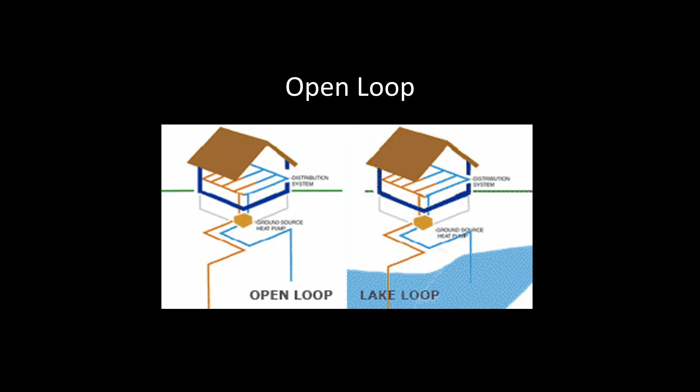So you could have it in a deep well hole where you're pumping water in and pumping water out elsewhere, or with a lake. Open loop is a little bit more challenging. Closed loop is more efficient and typically more easily found.

Now, to give you an idea of cost, you might think wow, these must be hugely expensive. Well, check into a lot of the federal and local incentives. They've been running at almost 30 to 60% of your total geothermal cost, which can make a huge difference.

A standard air source HVAC system costs about, give or take nationally, $3,000 per ton for heating and cooling capacity during new construction homes. Some new construction homes are anywhere from 1 to 5 tons. Geothermal systems start at about $5,000 per ton and can go as high as 8 or 9,000 per ton, depending on the installation method required.

However, new installation practices are getting better and reducing the cost to the point where the price is getting closer to conventional systems. Factor in that you have basically reduced the cost of any further energy. We're getting to the point where there are production builders now building entire developments with geothermal, taking advantage of economies of scale for the community, and it actually comes in almost less than a standard conventional system. So if this becomes standard practice, you're actually going to be getting cheaper and then have infinite low cost energy. Great.

So why are we not using it yet? Isn't that a great question?

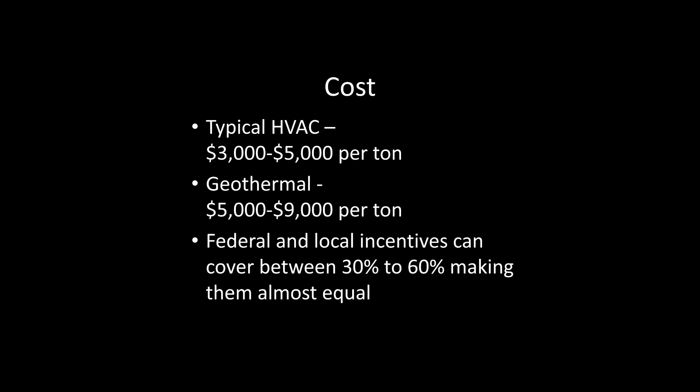In addition to all those cost benefits, you also have some other environmental benefits, and one is noise. When you're dealing with HVAC systems, either in a residential development or especially in a commercial cooling tower system, you're talking about a lot of noise. And with commercial cooling tower systems, an enormous amount of fresh water gets wasted. So there are tremendous benefits on all sides.

If you're working on a new project now, even a commercial project, you may want to consider investing a little time in researching if this is a good method for your client.

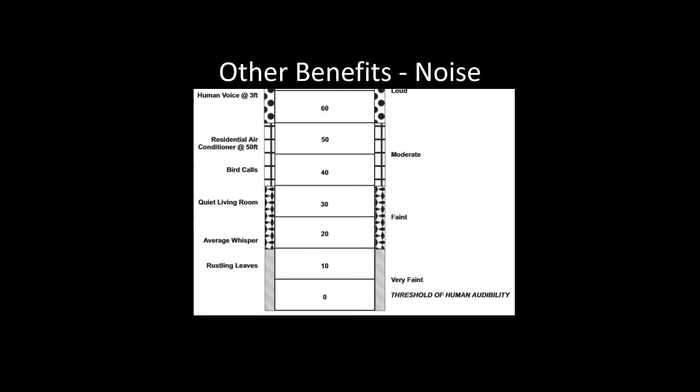Geothermal also has the benefit that no equipment is outside. So all those people having their air conditioning units stolen for the copper coils, or flooded during a weather event, avoid that. In fact, in Florida, for government buildings, hurricane hardened shelters are required to house the outside equipment. Those enclosures could be as large as a gymnasium and cost millions more.

So in that case, a geothermal system is actually cheaper than a standard system. And even if the house blows away, with these closed loop systems the geothermal is intact. Just hook up a new geothermal pump, because your pump may be gone, put a solar photovoltaic panel out there to power the motor, and you're in business. You could actually have the coolest tent in the neighborhood after one of these.

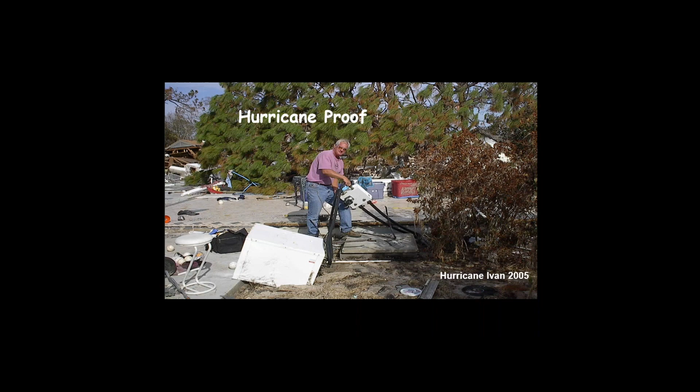So why not geothermal? It's resilient, it's energy efficient, it's quiet, it's cost effective, especially if you have any rebates or take advantage of doing a number of houses or buildings close together for economy of scale. You have low carbon emissions, or no carbon emissions if it's powered using solar photovoltaic panels, and it's incredibly long lasting. And when you compare it to a commercial cooling tower, you also save all of the water on that.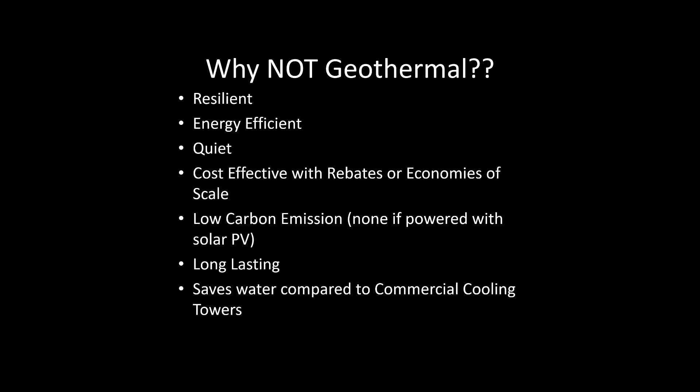So again, there are all different ways to get to net zero energy. It is going to be coming. We are not seeing a huge drop in fossil fuels. Coal is finite, oil is finite, and we don't have control over them. They can be turned off if we can't get the supplies. So this just makes sense from a practical viewpoint. You may not be able to go fully net zero, but you definitely can apply at least a little bit and mix some in.

So I like to leave you with a little bit of humor. What do you call a massive solar energy spill? A nice day.